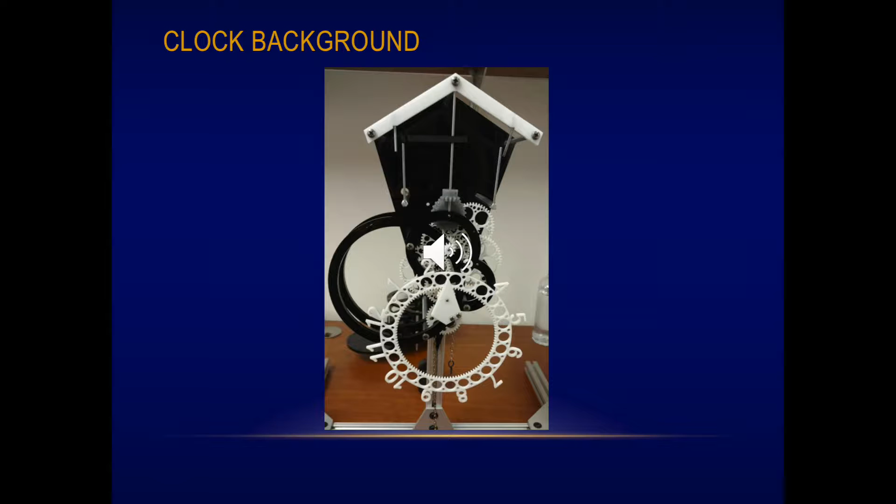Our sponsor wanted to recreate this clock in the coming spring semester so that he could give about 50 clocks as gifts to the people who helped out at the freshman engineering conference. In order to prepare for the mass production of the clocks, our group needed to create a number of deliverables. First of all, we needed to analyze the assembly process and improve its efficiency. We needed to create a standard process and create official documentation of this process.

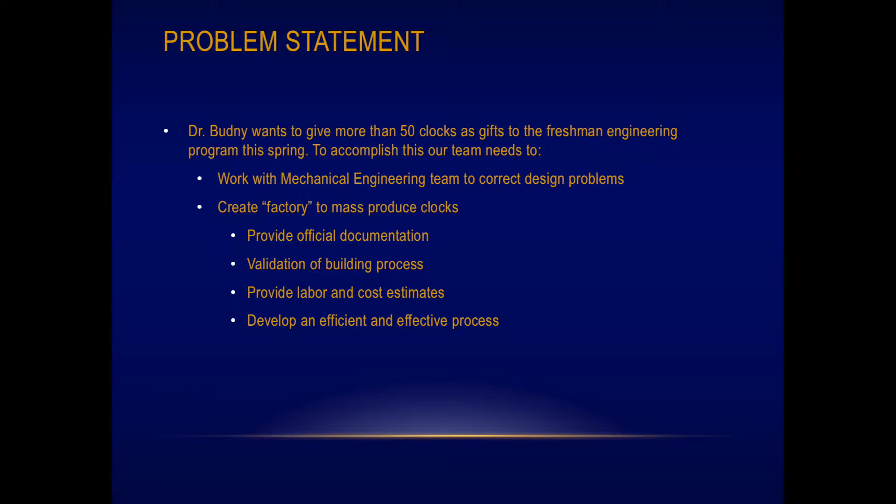To ensure documentation was effective, we needed to validate the building process by using the documentation as the sole source of knowledge to build a number of clocks. Finally, we needed to calculate labor and cost estimates in order to determine the price of production of a DaVinci clock.

The methodology used by our group to best assess the problem presented in this project included creating multiple prototypes at different steps in the process. At first, this helped our group become more familiar with the clock and how to assemble it, but we soon became able to critique the production process and improve the transition from raw materials to product. We fabricated sub-assemblies that would be crucial to the success of our proposed facility layout and worker flow diagrams. These multiple builds also allowed our group to conduct time studies for forecasting the labor needs and associated costs.

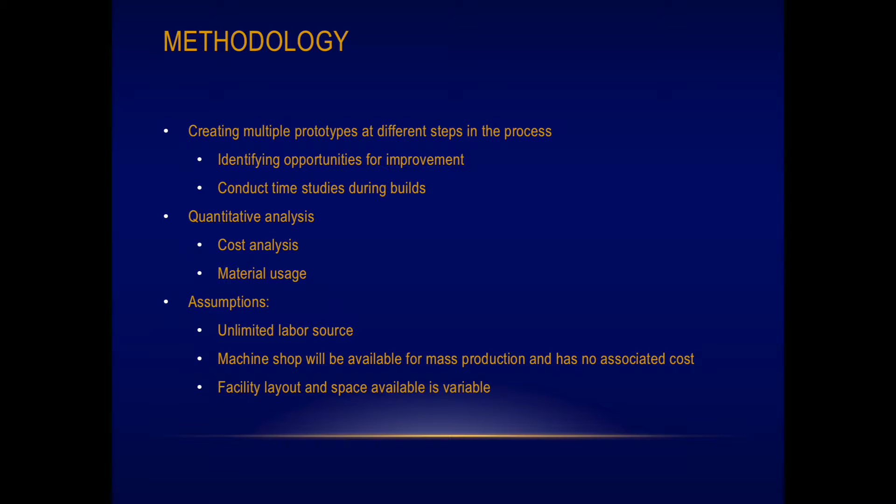Our quantitative methods for this project included both a cost analysis and material usage report. The cost analysis took into consideration the price of all factors that impact the clock, including items such as purchased parts, materials, and labor or shop time. The material usage calculation determined how many clock parts can be generated from the size of material we have been using. Our assumptions for this project included that we had no limit to access of labor, that the machine shop will be available for mass production at no associated costs, and that the facility layout and space available is variable.

Our analysis also included multiple variations of flowcharts such as the one shown here. These were created for both the fabrication and assembly portions of the clock. High-level flowcharts helped establish a general idea of how the processes interact, while the low-level flowcharts get into more specific detail about the steps that may not be seen on a high-level map.

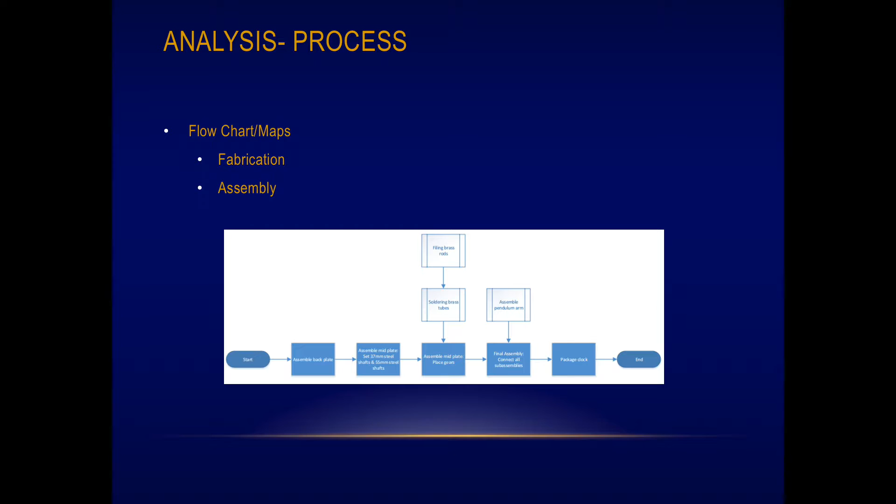As a part of our analysis, we created a Yamazumi board to help us perform a line balancing exercise. This is a visual tool to help identify bottlenecks and even out zone tasks. As you can see with this board, our tasks are organized into the zones shown before in the flowchart. This separation of tasks takes around 20 minutes per zone, evening out the tasks to be within the margin of error of each other. This current line balancing represents an even flow throughout the assembly line.

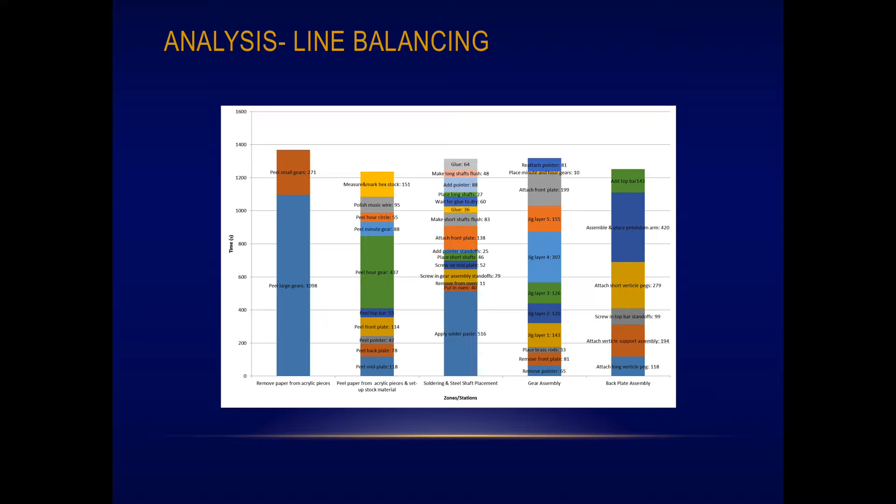Next is our analysis of our stock material. This diagram and others like it demonstrate the best way to cut a piece of stock material to optimize the number of parts produced from each piece without overproduction. From this, we thought it was important to consider the scrap rate. With our material usage calculation, the scrap rate for each piece was kept under the industry standard of 10%. We were able to use this material usage in predictive measures and cost calculations shown later.

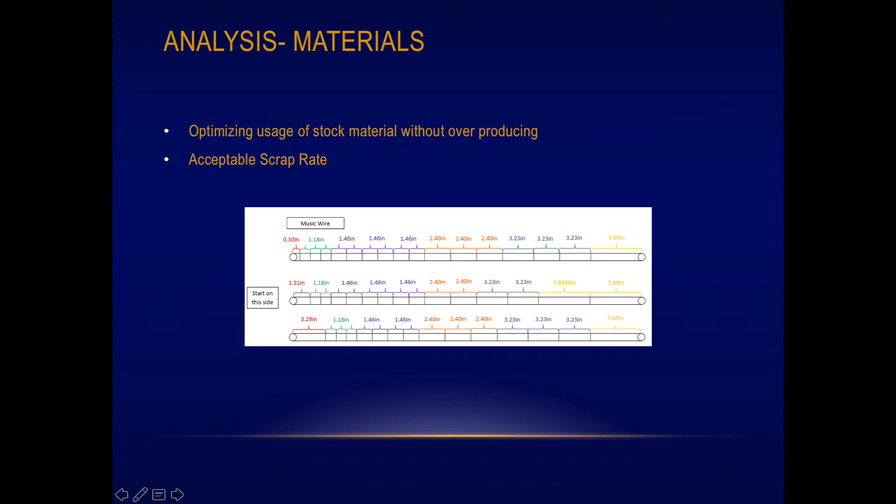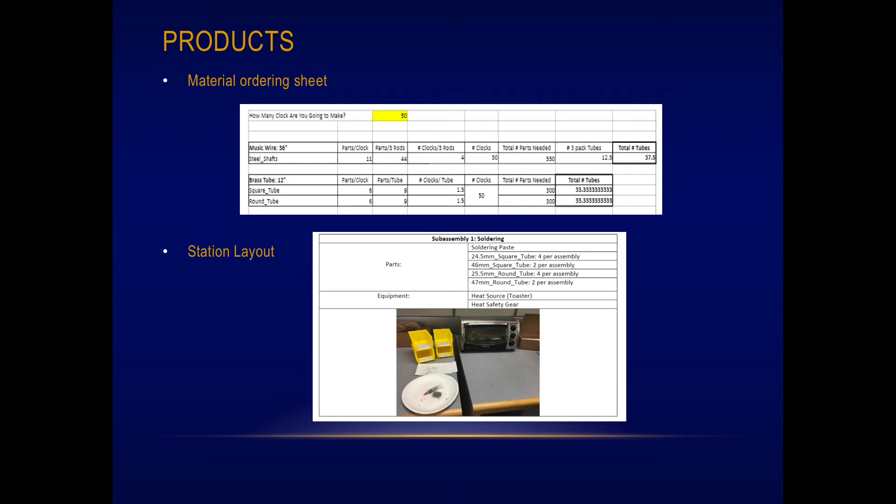As part of our many deliverables for this project, we created a material ordering sheet and station layout. The material ordering sheet uses the information we collected in our material usage analysis to help us determine how much stock material must be ordered to produce X number of clocks. The station layout provides details on how each subassembly area should be laid out, which parts can be found in that area, and which equipment will be required to both assemble the clock and keep you safe.

Since we are creating the clock assembly process from scratch, our group documented the process thoroughly throughout the assembly. We created detailed SOPs for all machine processes and the assembly process. The SOPs provide both directions and pictures to help guide you through each process. BOMs provide a list of the materials required for assembly, and the purchased parts list tells you where to buy stock material at the cheapest available rate for each material. The assembly aids and instructional video serve as additional aids to the SOP and outline greater details on some of the more intricate pieces of the clock.

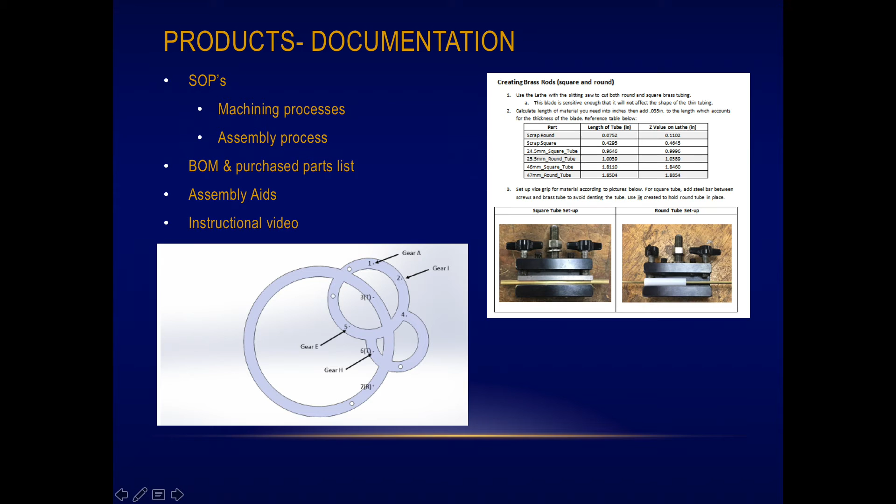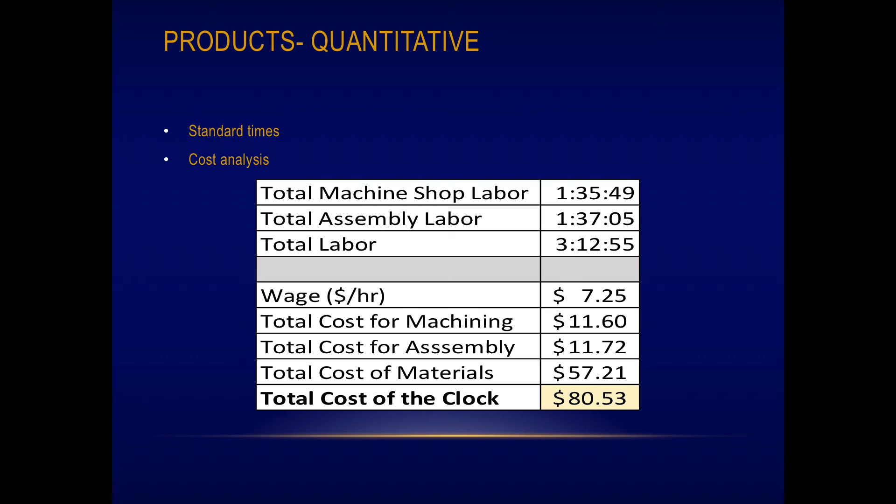In order to calculate the total cost of the clock, we started off by determining the total labor hours needed to make it. We recorded several times for each step of the machine and assembly processes. We took the average of those times in order to find the standard times for the entire process. Once we had the total labor for the clock, we multiplied it by the wage provided to us by our sponsor to determine a labor cost. We then determined the cost of the materials for one clock and found the total cost for each clock. We found the total cost of the clock to be $80.53.